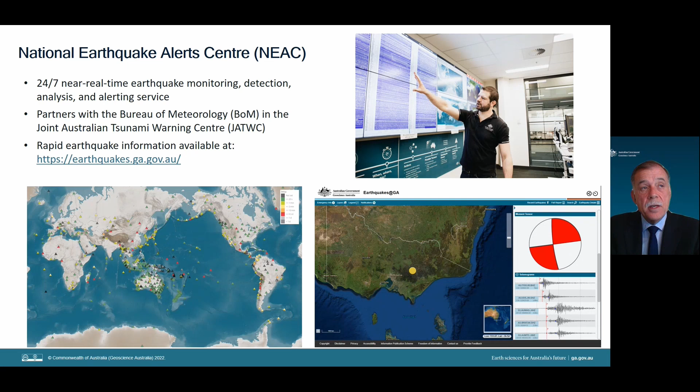It's a 24/7 facility. We monitor earthquakes in our region, provide information rapidly on these events, and we are partners with our Australian Bureau of Meteorology with the Joint Australian Tsunami Warning Centre. When it comes to the information we provide, it includes shake maps. We also curate and produce the Australian Earthquake Catalogue. In turn, we use this to improve our understanding of earthquake hazard across Australia.

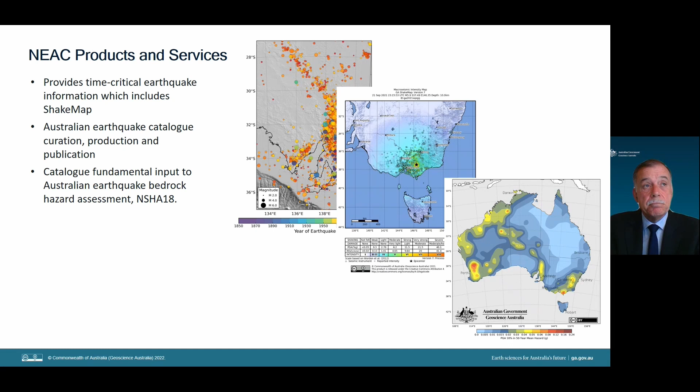We've added to this capability more recently in enabling members of the public to submit felt reports. And an example of the use of this opportunity to submit felt reports was following the Victorian earthquake of Woods Point, September 2021, where we received some 41,000 felt reports from the public, and were in turn able to communicate that information back to external users.

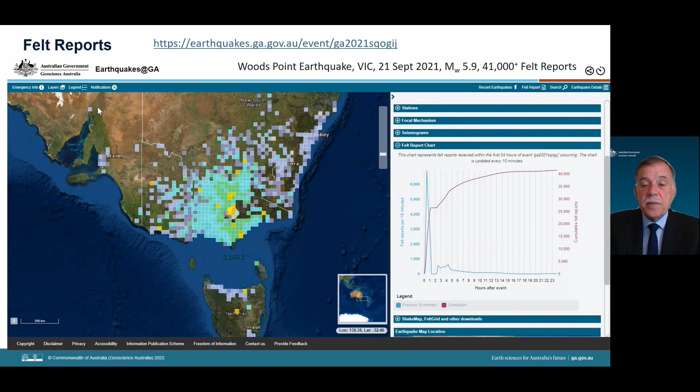When we assess impact, risk and mitigation, we use the same approach used in the financial sector, where we bring together hazard, exposure and vulnerability. Increasingly, we are nuancing our view of risk with resilience, and also there's a greater and greater demand for information on what to do, how to mitigate the risk where it exists. Our hazard scope is broader than geological hazards, so we also include weather-related severe events too.

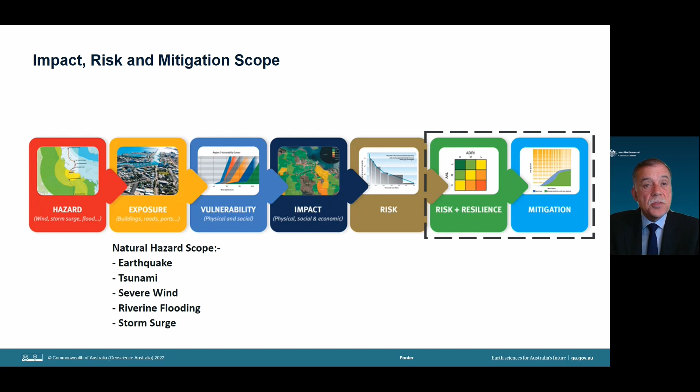Now, an example of how we bring these elements together is the tool HazImp. It's a modelling application where, for example, for wind, we can bring together the wind hazard, the exposed buildings in our communities, their vulnerability, and at a range of geographies, we can assess impact and risk.

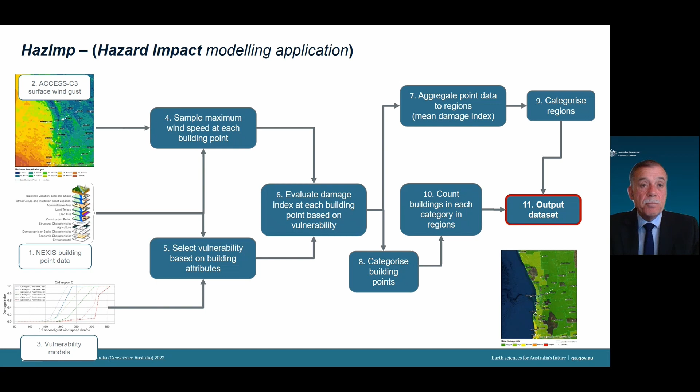An example of where we've used this tool, HazImp, is with the recently completed severe wind hazard assessment for southeast Queensland. This was a major project over 2 years with some 19 stakeholders, 15 partners, including the insurance industry. And the reason for the interest in southeast Queensland is the concentration of a community exposed to severe wind there.

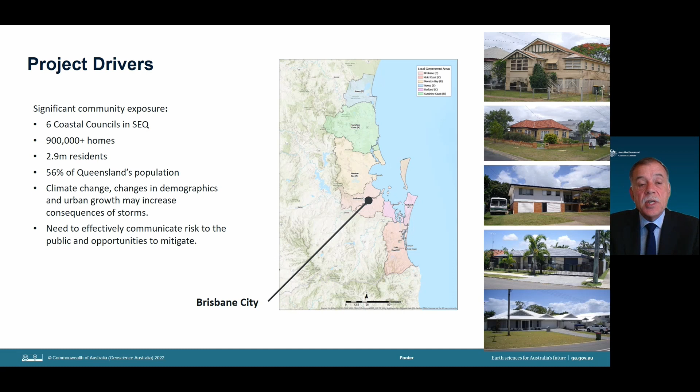And for our stakeholders, they wanted to better understand the risk severe wind poses, cyclones, thunderstorms and synoptic events, and how that might change with climate change, the strong growth that's occurring in this region. What are the opportunities to mitigate it? How to communicate this information to those that can invest in mitigation.

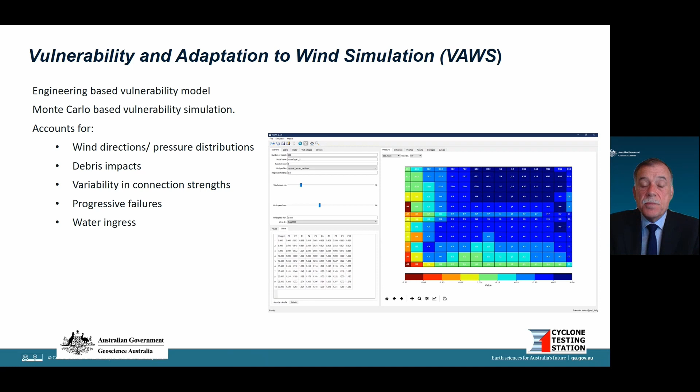Now, to understand the vulnerability of these homes, we made use of a tool, a software application developed at Geoscience Australia in collaboration with James Cook University. It's an engineering approach to assess the vulnerability of houses, and how that vulnerability might change with mitigation interventions. So to show the information that is produced, if we take one of those house types, the top left, it's called the Queenslander.

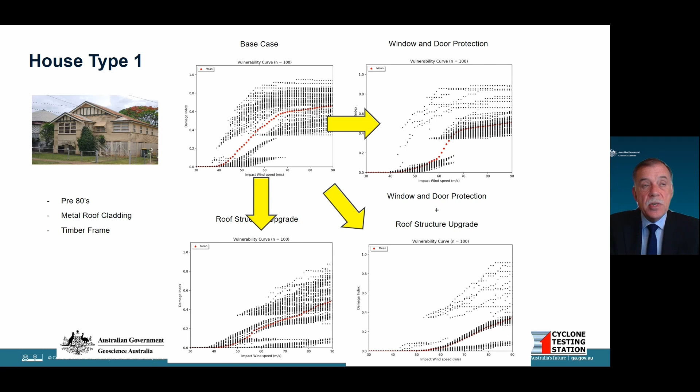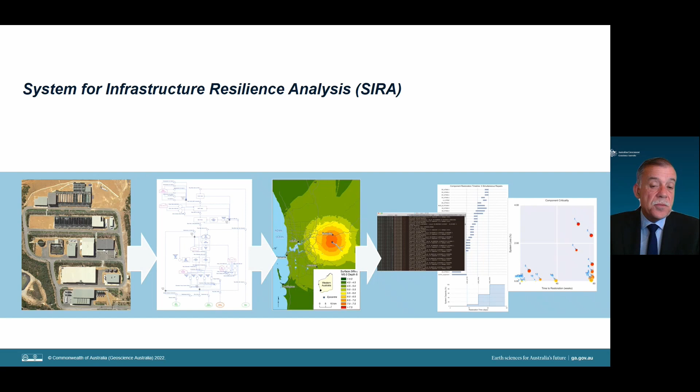Looking at their infrastructure facilities, we took a systemic view, and to do that we made use of a software application developed at Geoscience Australia called the System for Infrastructure Resilience Analysis, SIRA. And what that enables us to do is to look at a facility at component level, look at its respective vulnerability of the components, how they are damaged, what that means for system behaviour, and what that means for delivery of service.

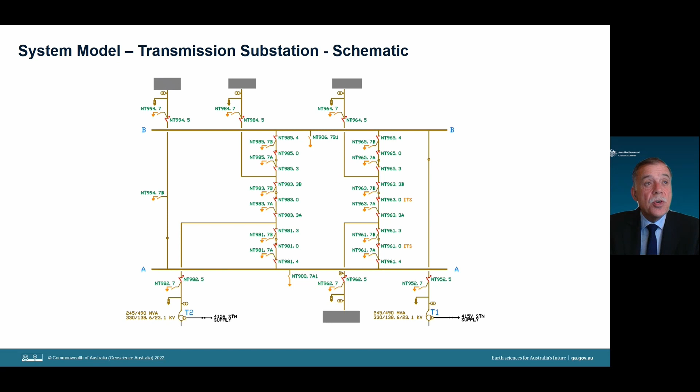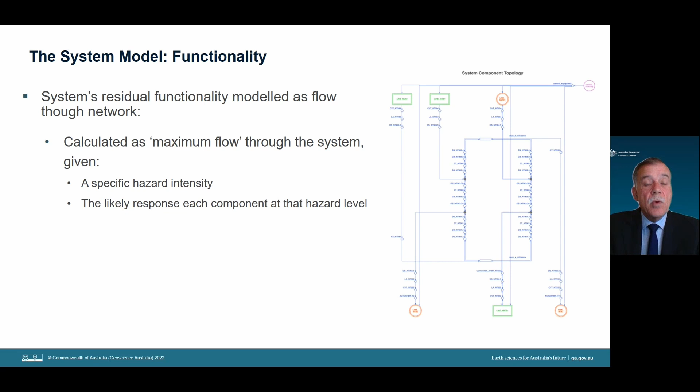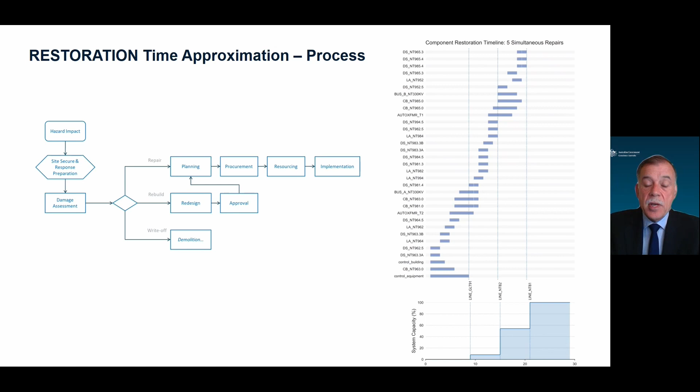So as an example, if we take a transmission substation, we have a schematic of how the substation works. We can, through a Monte Carlo process, simulate the damage to the components in this facility with increasing hazard. We can look at the damage state of the components and put it into a network model where we can look at what it means for delivery of service right after the event. And then working with industry, we can look at the recovery prognosis of these assets and what that means for the recovery of delivery of service by that facility.

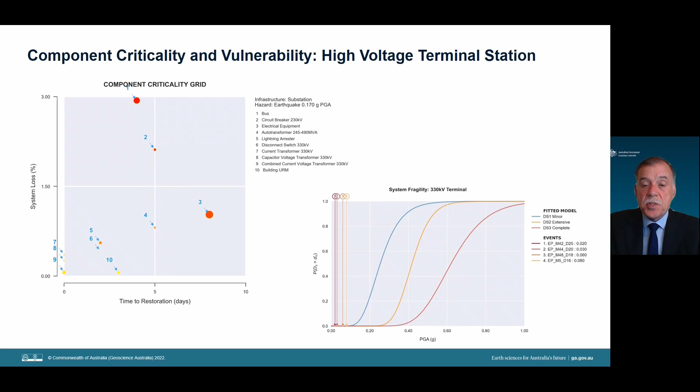Now, what that enables is for infrastructure asset managers to identify components that may warrant a priority when it comes to mitigation. And what we're also able to do through this application is to generate fragility curves for different types of critical infrastructure assets that we can use more broadly.

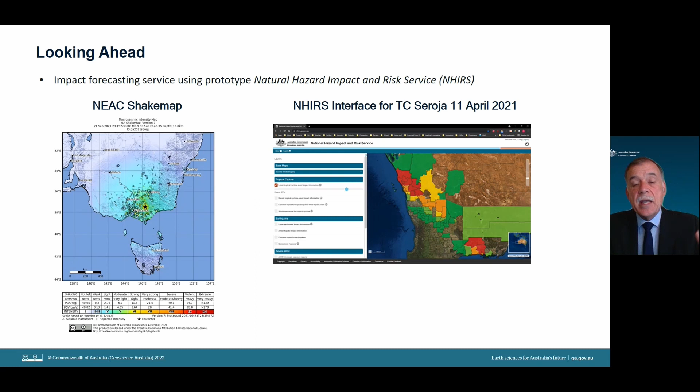Looking ahead, we want to take our alerts through to impact forecasting. And we have the prototype Natural Hazard Impact and Risk Service. It's an enablement of the workflows of HAZIMP, where we could take, for example, a shake map from NEAC and simulate what that means in terms of damage to buildings and infrastructure, and communicating it to emergency management and asset owners.

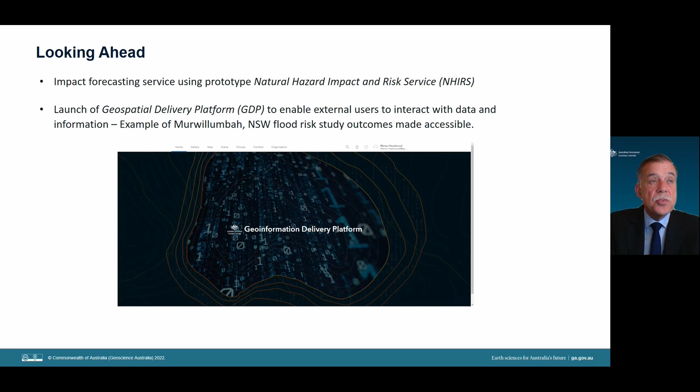We want to make our data and information more discoverable and enable external users to interact with this information. So we'll be launching the Geospatial Delivery Platform to enable users to do this. And as an example, we recently did a flood risk study for the New South Wales town of Murwillumbah. The outcomes of that study have been enabled in our Geospatial Delivery Platform. So it enables an external user to explore it as a case study.

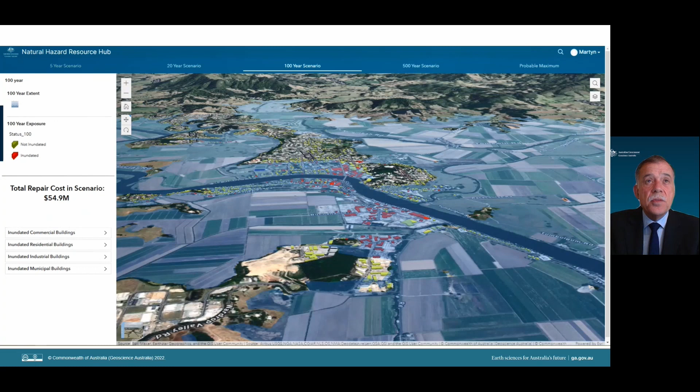We can look at the extent of flooding in this community with different average recurrence intervals. We can look at what properties are inundated. We can look at the extent of damage right out to the probable maximum flood.

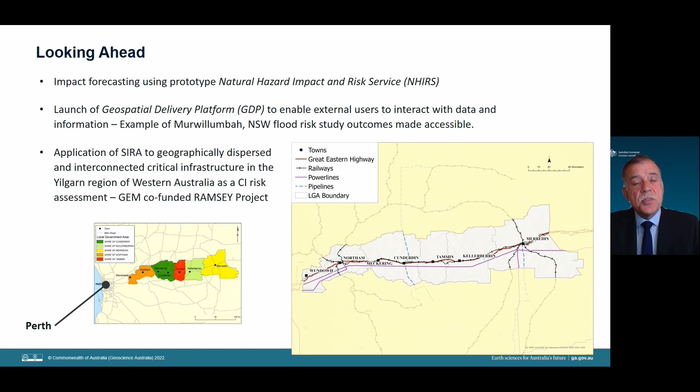And then finally, we want to extend our application of SIRA to geographically dispersed systems. And that is underway, looking at the critical infrastructure corridor that runs from Perth east out to the goldfields. And we're looking at the interaction between interdependent systems, geographically dispersed, where we're looking at true infrastructure risk due to earthquake in this project.

So in summary, Geoscience Australia as a government science agency is built upon its capability to meet the needs of disaster risk reduction. The focus is multi-hazard. Increasingly, the information needs deal with mitigation. We've developed capability in part through collaboration. We work with critical infrastructure asset managers in a trusted way, dealing with their sensitive information. And while not everything can be shared from that work, where possible, we share what work is done. And when it comes to the modelling capability that we've highlighted in this presentation, we share this open source.